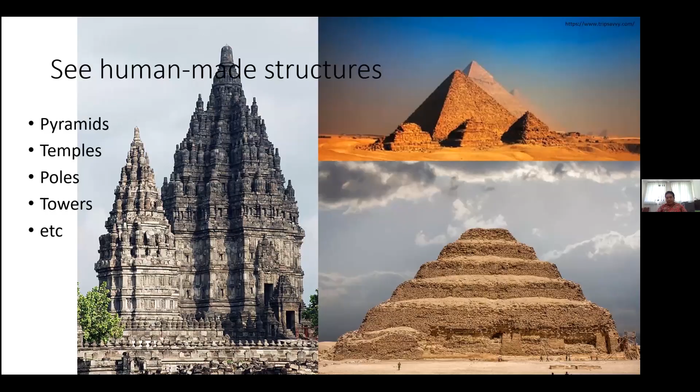You are very correct - they are using triangular shapes, isn't it? So that's why we will talk more about these triangles, because triangle is one of the keys of nature. That's why this is very special. We can find it here in the pyramid, either new or old pyramid in Egypt, and also in our temples - dalam candi kita juga kita bisa melihat bentuk secara umum adalah triangular, berbentuk segitiga. Still continuing with one of our great temples, Borobudur - if you see here, triangle is the basic form of these temples, both Borobudur and Prambanan.

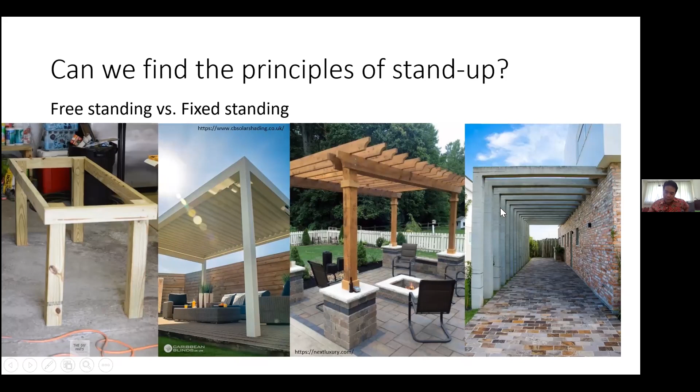So what is free and fixed standing actually? If you have poles, for our flag let's say, how do you make it stand up?

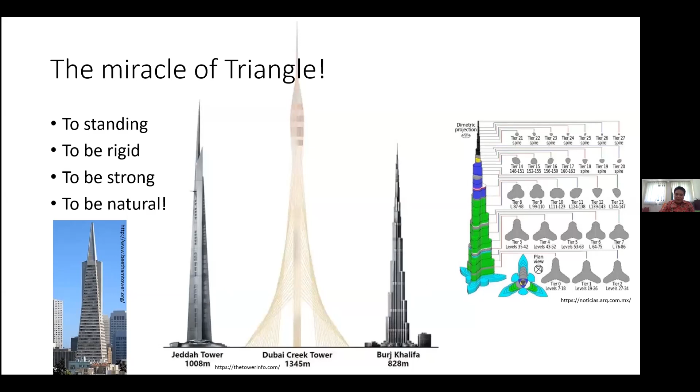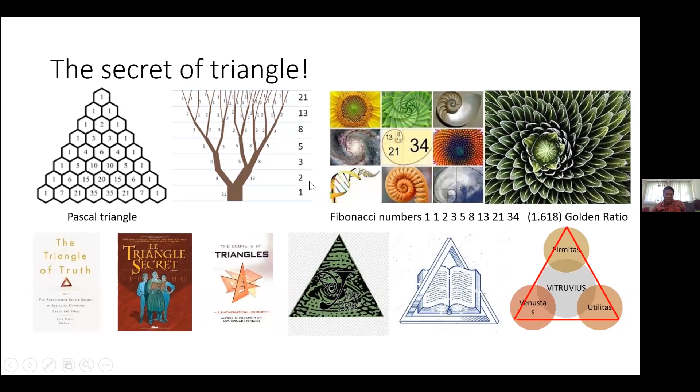No? Okay, then we are back to triangle. Why is this triangle so special, so very strong, not enough but very, very strong to be one of the keys of this universe.

For example, this is the distinction of some distinctions, yeah, because it has many distinctions.

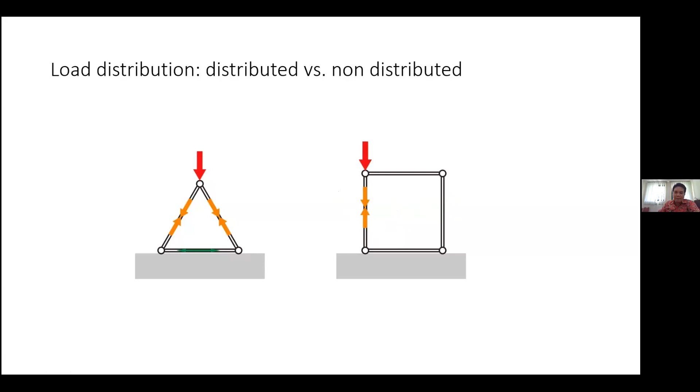Vertical load, what about the lateral load? Earthquake, wind, etc., same actually. If we push from this direction to this member - oh yeah, I forgot to tell you that this is what we call desak, compression. I think you already discussed this with our teachers in structural courses.

The other one is tensile, or tarik. Jadi di dalam sebuah struktur, terutama truss atau rangka batang, kita mengenal ada dua beban di sana, yaitu beban-beban desak dan beban-beban tarik.

Dan beban desak tarik ini kalau dijumlahkan sama dengan beban yang diberikan kepadanya. Ini adalah hukum Cremona, Cremona laws. The total sum from load is always zero. Action similar with reaction, if we want our structure to still stand up. Otherwise it will collapse, if overload more than supporting here, of course this will collapse.

Is there any question here? I'm not talking about the reaction here because Pak Pri and Bu Eti or Bu Diah talk about that.

I'm just focusing on the main condition. If we put something, of course there is a reaction here. There's also reaction here from the base, isn't it? From the base also here.

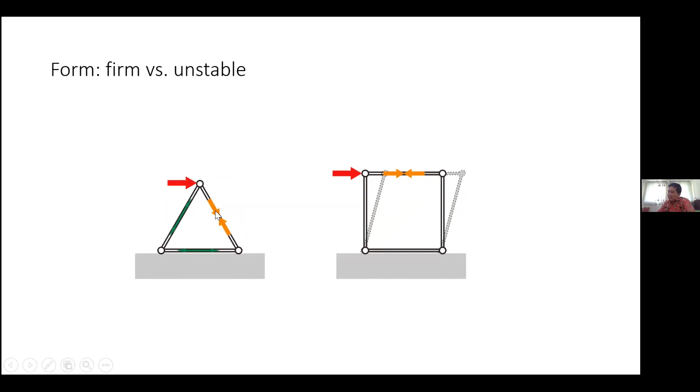So then how to make it firm? Of course, we go back to our triangle. For the first triangle, no need to put anything because we already have a triangle. But for the second case, we have to put a triangle, something like this or something like this.

It's up to you. If you choose this, it means we have compression here. We have compression when we choose a diagonal like this, when the load is here.

But when you choose the opposite diagonal, is that allowed? Yes, you might choose this diagonal instead of this one. But you have to understand that this is not the same - this is tensile, tarik.

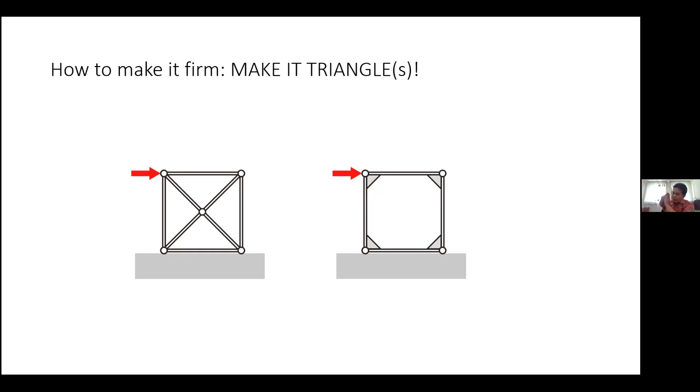Okay, is there any question here up to now? Because we have to go back to our examples. Is there any question up to now, please? Okay, no question means you understand.

Okay, the miracle of triangles - to stand, to be rigid, to be strong, and to be natural. Of course you may see here that all of this needs a triangle. I mentioned this - why are they not using a triangle?

Sorry, why are we not using a building like this instead of cable? What is the reason for this?

You see that we have a triangle. This triangle has a limit, of course. There is a limit on the triangle. What do I mean by limit? The limit is the comparison between height and width.

In this case, this is the width of our triangle and this is the height. The comparison ratio between height and width is about 1/5 to 1/6 optimally. If you go less than 1/6, maybe we get a very thin triangle, and a very thin triangle is not good to support the building.

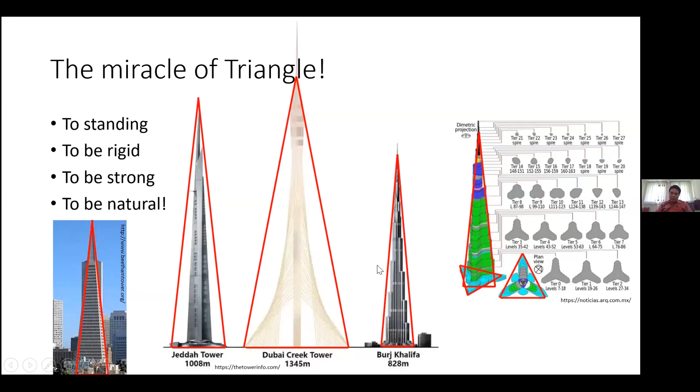So this is the way to make our building stand up, and also found everywhere. This is the Hancock building - of course you may see the triangles here. And also we may see arches from bridges and also from roof frames, isn't it? Most of them use triangles.

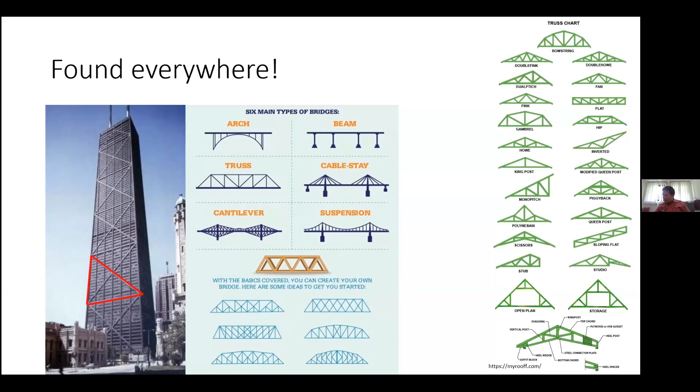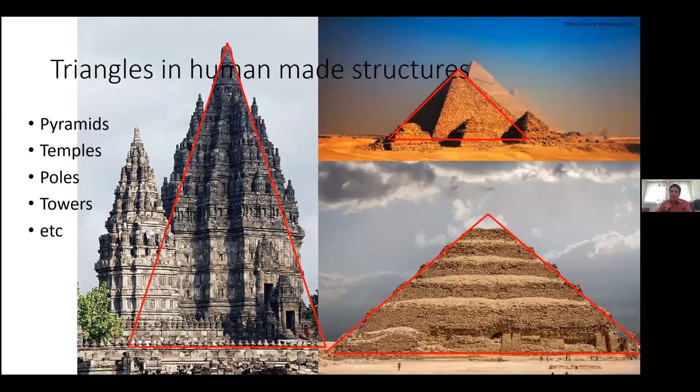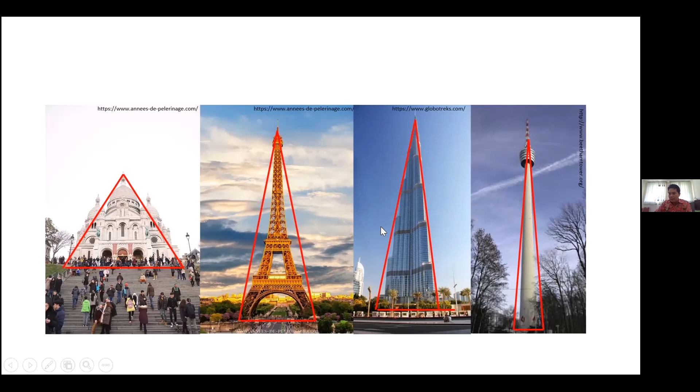What about this? I told you that there is a triangle. Yes, this is triangle. You see here, but our triangle is small here. So in this matter, you have to make this strong connection.

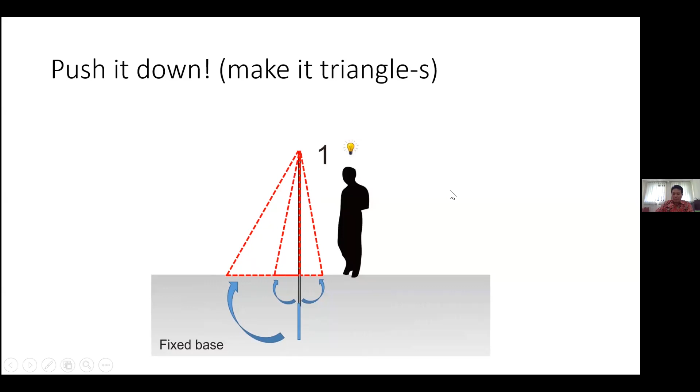Bagaimana dengan ini? Sama ya. Ketika kita punya ini, kita sebut sebagai cantilever. Sekarang kita menginjak ke cantilever. Cantilever adalah sebuah sambungan yang tegak lurus terhadap tumpuan. Jadi sebenarnya ini sama, cantilever. Maka cantilever ini akan diwakili oleh segitiga ini. We have a cantilever on the triangle.

Ini yang tadi ya, dengan kehadiran segitiga kecil ini dan segitiga besar yang kita pasang, semakin besar segitiga, maka dia akan lebih firm.

Ini juga sama, ini adalah prinsip dari tower yang direncanakan tertinggi di dunia tadi, di Dubai, 1.300 sekian meter tingginya. Dengan menggunakan prinsip yang simple kayak gini, kita tidak harus membuat fondasi yang mahal. Saya katakan tadi, tower itu jauh lebih murah ketimbang Khalifa, karena Khalifa harus menggali fondasi jauh sehingga dia tidak boleh amblas dan tidak boleh terguling ke kanan kiri. Tetapi dengan ini walaupun tetap sama digali ke bawah, tapi tidak seekstensif atau semahal Burj Khalifa. Karena prinsipnya lebih simpel dan akhirnya bisa menjadi lebih murah.

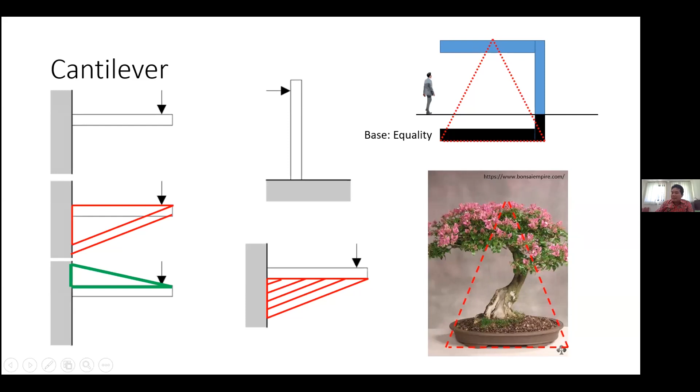Ini juga sama. We have a bonsai. See, we have a triangle here in order to make this bonsai stable. Although it look like canopy cantilever, isn't it? But actually the triangle is working over there.

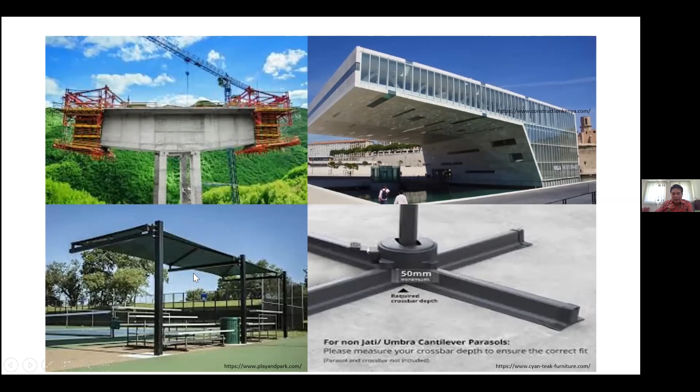This is the example of this canopy, cantilever. You see here, cantilever. And this is cantilever also. Kaki meja dan jalan layang sebenarnya sama, dua-duanya sama menggunakan prinsip cantilever. Yang satu ada di atas, satunya ada di bawah. We have table leg here, and we have highway supporting system, which is using cantilever. Ini contoh dari apa ini? Panggung kecil gitu ya, yang menggunakan cantilever juga. Ini gedung besar yang menggunakan cantilever.

Oh, do we have time? Oh no, it's already 14:16. I think I still have time, around 15 minutes maybe. Pak Wisnu, is it okay? Yeah, you can carry on until 14:30, and then we can have Q&A sessions after that for maximum until 15 p.m.

Okay, so we continue with this funicular structural principles. What is funicular actually?

This is an interesting fact that actually as an architect, we can do this. Who is the architect of Sagrada Familia? Does anybody know what Sagrada Familia is?

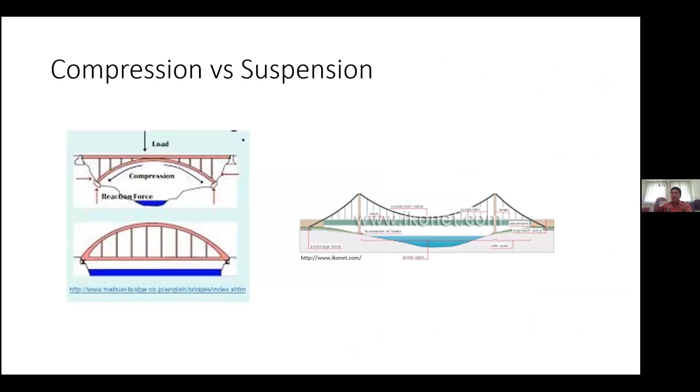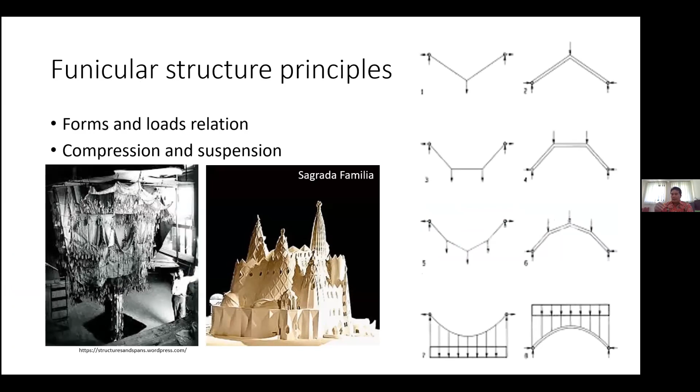So what about this? This is an example: bridges. The left one uses compression, the right one uses a tensile system. You see that the form is similar, but in the opposite way. So that's one - I just roughly talked about the funicular structural system, but at least it will give you understanding about form and structure in these two types between tensile and compression systems.

Okay, we are coming to mimicry or mimetic. Mimicry versus mimetic in structural systems. The left one we call mimicry - to mimic, to mimize the appearance from nature to human-made things, from fish to building. But this one is funny.

Actually, recent times, maybe have you heard about our new Istana Presiden? Yes, that one uses the burung Garuda, the eagle bird - or condor, I think - as the form of the building. What do you think about this new Istana Presiden, according to you? Is it funny or not? So it's actually similar like this, isn't it?

But the other one takes inspiration from nature - using only the inspiration, not the form as raw inspiration, like this. This structural system was taken from the leaf frame - you know leaves from trees, and there is a frame inside the leaf. From this inspiration, they created a structural system like this. So this one we call mimetic, and this one we call mimicry.

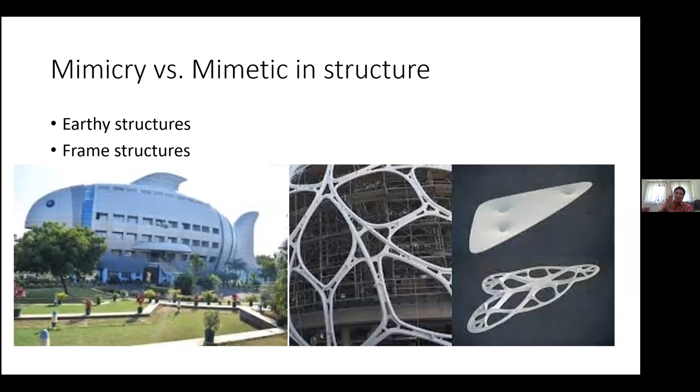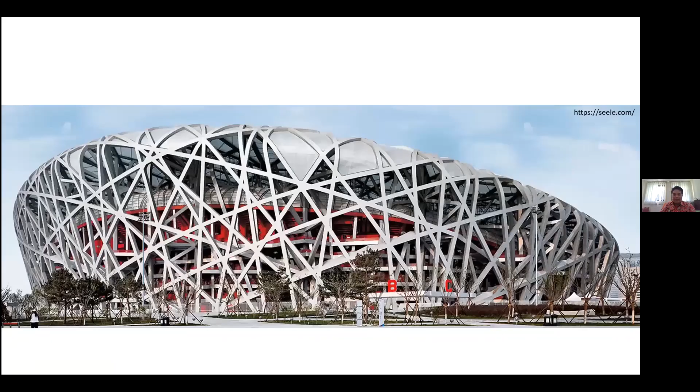And this is a bird nest. The system they use to make a nest for birds, we take inspiration from this structural system and make it efficient and cheaper than other structural systems, because they only use smaller elements and create a link between them. So the structural system of the bird nest is exactly taken for this very grand, very big structural system. Okay, and this is the project example.

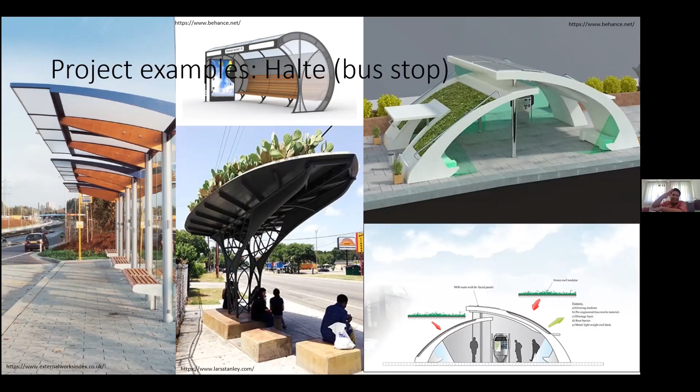Same as this, this is a half circle bus stop, something like this, and also here. So these are examples of these two elements, between vertical and horizontal, or even you can combine vertical and horizontal with this curve, like this bus stop, or maybe lean, not vertical, not horizontal, but at some degree. You may propose that as well, but you have to think how to make it stand up with those systems.

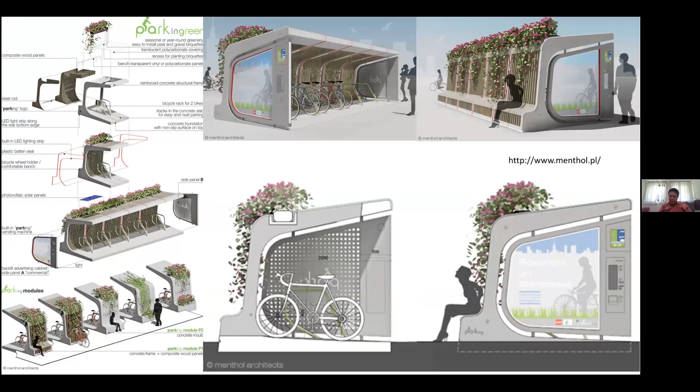This is another example with this C form, and you may create this kind of bicycle station to make an element between vertical and horizontal. You might find something like this. Okay, that's all, thank you very much.

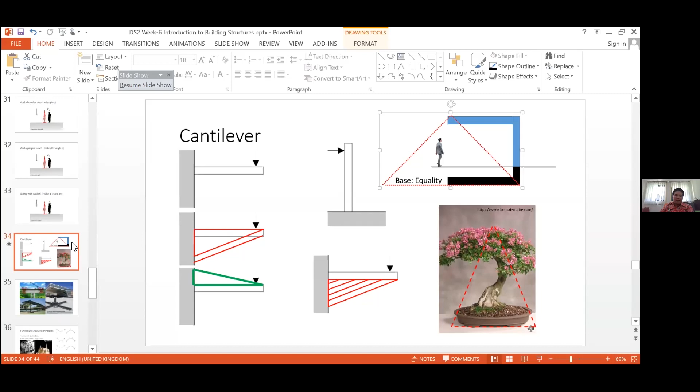Is it answering your question, Bu Sugini? The other one. If the origin form is triangle, I mean, yes, is there actually any formula? Maybe it's not more than...

Yes, for example, like this. Is it? For example, this is too tiny. How about fat? The same. Is there any formula? No, no. Actually we're talking about the rigidity, about how it's strong enough, this relation between height and weight. If we make this, for example, something like this, okay, we don't have any formula in mind, because you may create something like this.

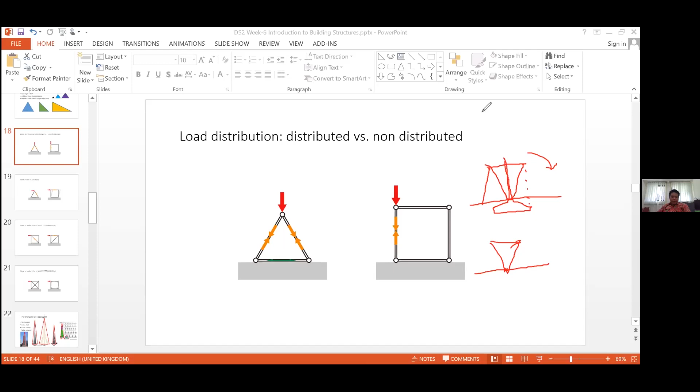Jadi betul ya. Jadi misalnya kita bikin seperti ini nih ya. Ini kan beda antara tiang yang tipis ke atas gitu, ini karena saking banyak dietnya, dengan yang gembrot begitu ke sini gitu. Sorry ya, aku nggak bicara tentang apa-apa, cuma bicara tentang ini aja.

Ini kan jelas ya, bahwa ini jauh lebih stabil ketimbang ini kan. Karena apa? Karena segitiga kita itu ada di sini. Jelas ini sangat stabil. Ini di mana segitiga kita? Tidak ada. Ini pasti collapse. Kecuali dengan cara tadi, kita sudah banyak bicara tadi, pakai base, ditancap ke bawah, atau dikasih kabel.

Begitu ya. Karena ini, kalau menurut Bu Sugini tadi, ini titik beratnya kan ada di sini nih, dekat dengan ground, kalau kita bicara teori titik berat. Kalau ini, titik beratnya kan di atas sih. Pasti dia akan guling.

Gitu ya. Ini juga titik beratnya di tengah sebenarnya, cuman karena dia slim, cantilevernya akan bekerja tadi ya. Ini sama dengan cantilever tadi. Kita punya sesuatu, kita dorong dari samping, pasti dia akan membutuhkan kedalaman atau kelebaran. Mana yang mau kita pakai? Mau kedalaman atau mau kelebaran? Sebagai dasar untuk membuat struktur ini

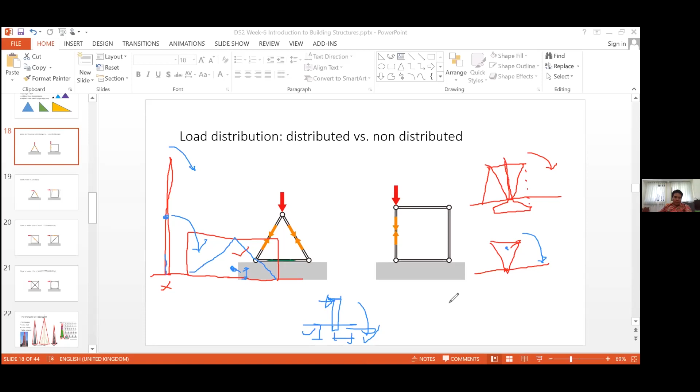Ini yang pertama ya. Kemudian yang kedua untuk kestabilan segitiga tadi ya. Kalau kestabilan segitiga, benar kata Pak Nur, itu segitiga sama kaki atau sama sisi ini yang paling stabil ya. Tapi untuk gambar yang tadi ada tiang kemudian ditarik dengan kabel ya, kabelnya itu biar enggak kepelengkang, terlalu jauh atau terlalu dekat ya. Yang stabil itu 45 derajat.

45 derajat itu paling efektif gitu ya. Termasuk kalau kita membuat atap juga, sudutnya 45 itu paling efektif gitu ya. Kalau terlalu miring atau terlalu curam mungkin kurang bagus dari beberapa sisi, misalnya kena air hujan mudah korosif, dan kalau terlalu datar gitu ya itu tampias dan sebagainya. Jadi maksimal efektif memang 45 derajat, termasuk yang struktur kabel tadi, ada tiang kemudian ada tali, itu 45 derajat.

Itu dibalik juga demikian ya, itu dari perhitungan struktur efektifnya tadi, beban itu akan ditarik setengah P ya, setengah beban, itu jadi 45 derajat.

Kemudian yang ketiga untuk bentuk segitiga yang terbalik, piramid yang terbalik ini, memang ada juga bangunan karya arsitektur bentuknya segitiga terbalik ya. Tapi tidak titiknya di ujungnya, tapi dia ditancapkan juga gitu. Jadi ada sebagian yang tertancap di tanah, semacam dijepit gitu, dijepit di bawah. Jadi tidak harus membuat pondasi yang sepanjang atau selebar seperti cantilever di atasnya gitu ya, tapi bisa juga dengan seperti ditancapkan.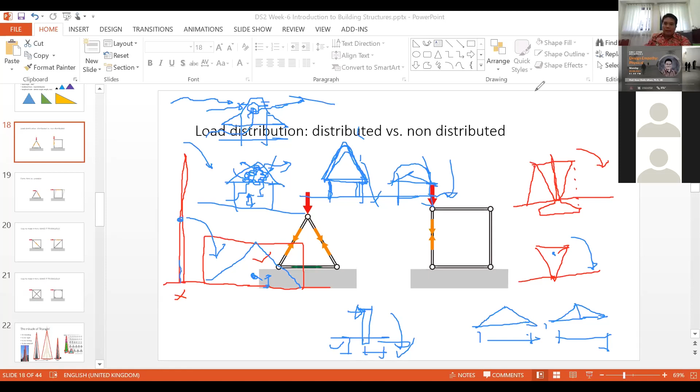Segitiga sama sisi jawabannya. Oh ya. Okay, maybe this one ya. I already talk about this. Ada lagi.

Well, this one. Yeah, actually this one, maybe something like this. The question is talking about how to deal with the size of the angles. Yeah, for example, this angle. We deal with 90 degree here and 45, 45. We deal with 60, 60, 60, for example. We'll deal with 90, more than around 50, and then around 40, let's say, something like that. So because we talk about the graphical scale, it's identical between angle, length, and size.

So if we have, for example, 10 kilo, this 10 kilo will divide it in these three equally if we have equal size and equal angle, and the load will be distributed equally because this triangle is equal. But if we talk about something like this, where this is not equal between this size and this size, so the load, if we have 10 kilogram, this 10 kilogram will divide it in 1, 2, and 3. Of course, the shorter one will have more load rather than the longer one, isn't it? So the first load will come to this, the second load will come to this, and the third load will come to this longer one.

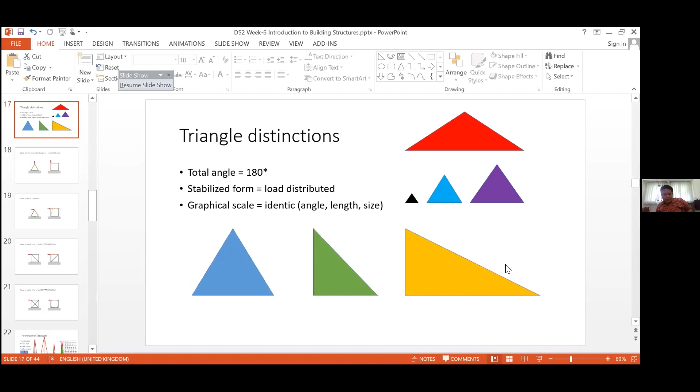Begitu, Bu Dia? Sudah habis, ya turun Pak Nur, sudah habis nih pertanyaannya. Monggo Pak Wisnu, saya kembalikan ke Pak Wisnu. Ya, yang terakhir tadi barusan sudah ya, yang dari Mas Fiorino ini. Sudah. Barusan ya? Enggak lah, malah pertama kali Pak. Itu tadi yang pertama kali dibaca dari bawah. Oh. Ini bolak-balik ya? Sudah Pak. Saya bacanya dari bawah tadi. Masih adakah? Mungkin?